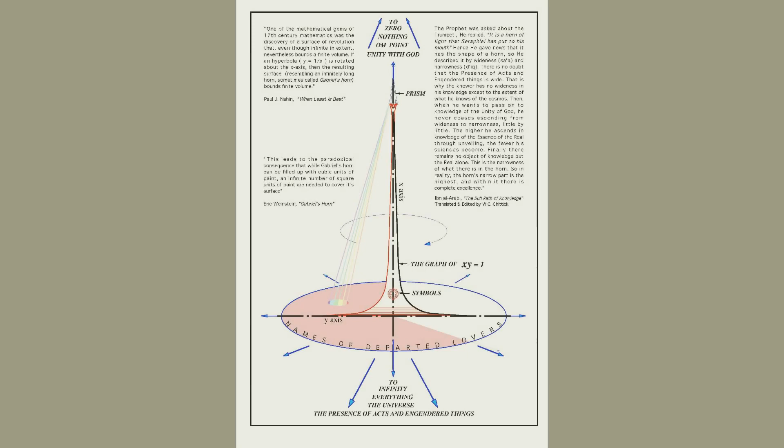That's a hyperbola, and it starts level and gradually becomes vertical. When that's rotated on its vertical axis, you get this shape. Hope you can see that.

In mathematical terms, the shape that rises is always approaching vertical but never quite reaches vertical until infinity. At the bottom, it keeps approaching horizontal and never quite reaches horizontal until infinity. So in 3 dimensions, at infinity this pointed object gets so tiny it becomes nothing, and at the bottom that circle gets bigger and bigger until it becomes everything at infinity.

So it's a very clear 3D shape expressing Baba's everything in the nothing, the Om point, Hinduism, where the creation comes from this point.

The mathematicians who came up with this were Christian, and they called it Gabriel's horn. The angel Gabriel blew the creation into existence through his horn. There's actually a reference to the trumpet, and wideness to narrowness is the path to excellence in the Quran. So the major religions seem to also have this image.

We'll get into details here. So that's what it looks like today. I thought we could carve it, but that was a naive assumption. Fortunately we have computers today, and computer-guided machines that can carve stone, and that's what we ended up doing. But the base of the tower is built in the shape of mastery in servitude.

It's built in stone from a quarry near Meherabad. The grave, let's see, is this? Ah, good. So this is the mastery in servitude symbol. This is Masaji and Chanji's grave.

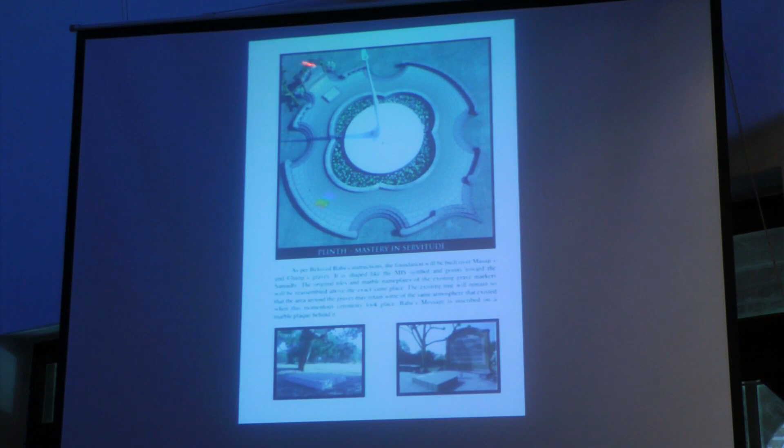The same grave markers were disassembled and replaced exactly over the original grave. This is where Baba sat, and this is where it all took place. On the marble, you can see it here, is Baba's discourse. And the mastery in servitude points to the Samadhi.

So, I think now I'll just start switching slides. I may have something to say about them, or I may not. If I can, this is 10 years of work. Let's see how well I remember it.

The spire. Obviously, we can't go all the way to infinity. So I thought the next best thing, make it transparent. And so it's built in glass.

And at the same time, because Erich liked prisms, I had prisms made, and they're included in this spire. And when the sun shines at a certain angle, you get a rainbow, a patch of rainbow color on the base.

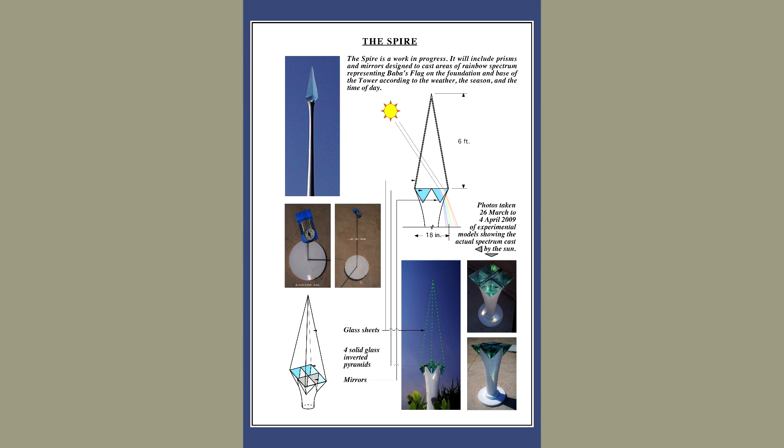In order to test this theory, or at the time it was just a theory, I went and bought some prisms, and I built this little thing to scale and put it on my roof. Yeah, there we are. That was in 2009.

Okay, 11 years ago. And I would orient it with a compass and see what time of day this little patch of color would last. And it worked. That was the model.

And to make sure it did work, I put it up on top of the roof of this house, so it is 56 feet in the air from the ground. And sure enough, it worked.

It moves. You won't always see it there. It has to be a sunny day, it has to be the right time of day and right time of year.

But I also discovered something else. That when you looked up at the rainbow, the spire itself turned into these colors. So you move your head a little bit, it would go to all the different colors. It's a nice surprise.

To make this work, the marble itself would not be strong enough, at one point it's only 8 inches in diameter. It needed a backbone. And that backbone had to be really strong, and it had to be really small.

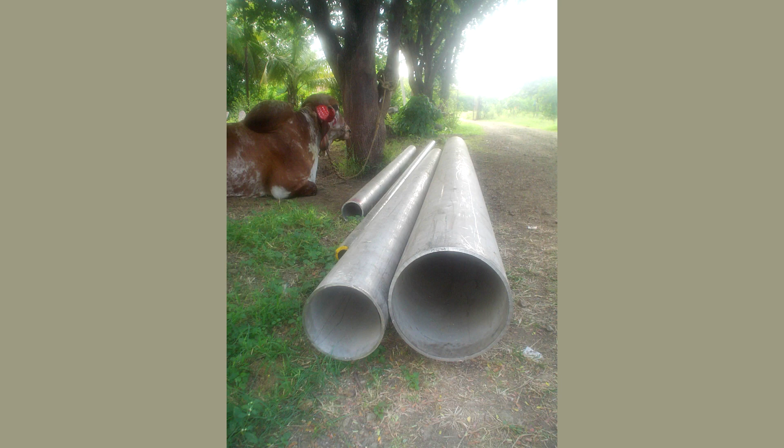And here they arrived at Meherabad. They arrived by truck. I don't even know, I never got to pay the guy. I don't know what trucking company it was. It just pulled up and dumped them.

I was given his number by somebody. Oh, no, he called me. He had my number. And he said, 'Where do you want me to put them?' And I said, 'Well, do you know where Meherabad is?' He said, 'Yes. Which side of the Dhuni do you want them?' And we've never found the guy. And that's a lot of money to transport all those pipes.

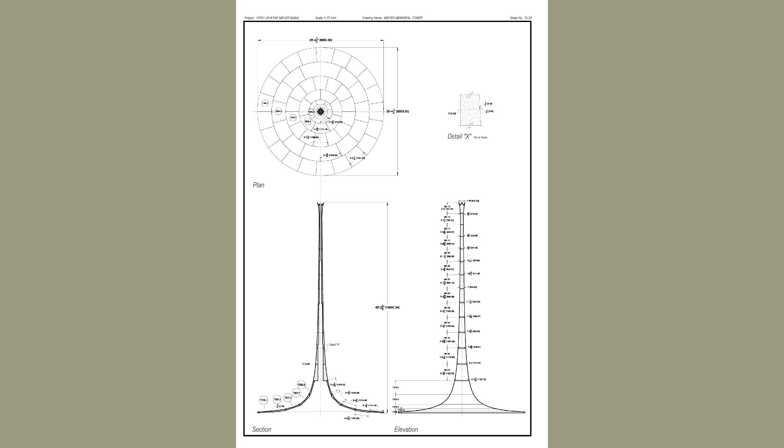This is an AutoCAD drawing. The other thing is, another little miracle, is the appearance of Ty Provosty, who's an architect, American architect. Like I said, the computer machinery that needed to do the carving had to have AutoCAD drawings, and I didn't do AutoCAD, so he said, 'I can.' And he did more than just draw them. He did a lot of engineering on it.

But it's from here, like a quarter of the way up to the top, there are actual cylinders, marble cylinders that are lowered over this stainless steel pipe. And then from here down, it's a concrete base, and the marble are pieces of 3 to 4 inch thick marble shaped like pieces of pie. I guess, well, you can see that.

And this is the factory. Someone suggested I get a hold of these people, and they have a quarry in Mount Abu. If you've ever seen Dilwara Temple, it's the most beautiful bit of marble work you've ever seen. They have this very modern, advanced factory in Ahmedabad that uses computers to carve mainly Jain temples all over the world. We went there. He said, 'Yeah, I can do it,' and gave me a price that was huge. So I said, 'Well, thank you very much,' and went away.

Those are the machines, or one of the many machines. And this is the marble. We looked in their marble yard and picked out the whitest marble we could find.

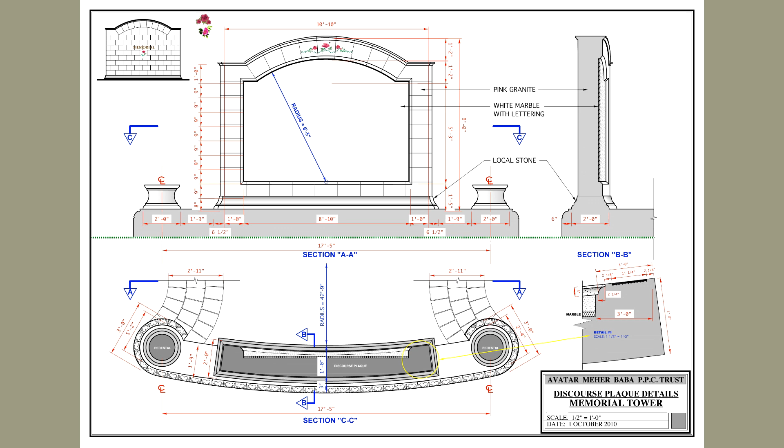Then came the plaque. We decided to do that in granite, and these people agreed to do that too. So that's the model, so far we've just been showing pictures of the model, but the real thing turns out to look very much like the model. These are the granite blocks that make up the plaque stand.

Can you see this, I guess, can you see where it says Memorial Tower there and stuff? Oh good, it's a little fuzzy, maybe it's my eyesight. But anyway, this is at the factory, they're putting it together.

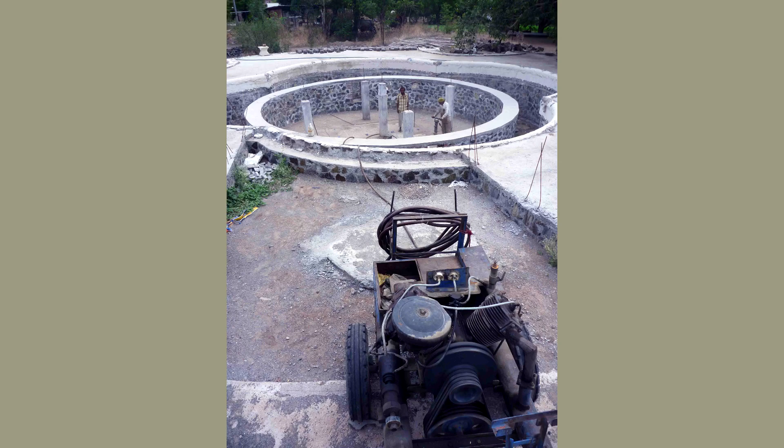That's Baba's discourse. They could do that with a computer because it's a flat surface. The surface that the names are on is not a flat surface, it's a very complicated surface, so it had to all be done by hammer and chisel. So now we just dug out the whole master surface shape down to hard strata and started building up, using jackhammers and pouring concrete, and stonework.

The stones came, as I said, from Niwasa and Vambori, quarries near Meherazad, and they were hand carved. What I would do is make full-size plaster of Paris models of each type of stone, and also stencils. So I don't know how many, but there's probably 200 or so stones with little hearts carved in them, just by some guy tapping away, like that. Can't really do that anymore.

135. 135? 135? Huey knows. Okay, good. How do you know? Okay.

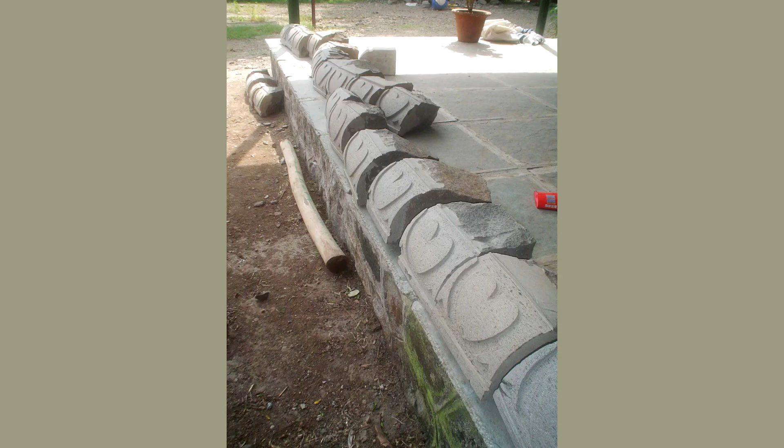That's just around... oh well, that isn't even half then. Yeah, I mean they're all around the outside too. So with forms, little sheet metal forms that showed the edges I wanted, and plaster of Paris models, the masons went ahead and carved all these stones.

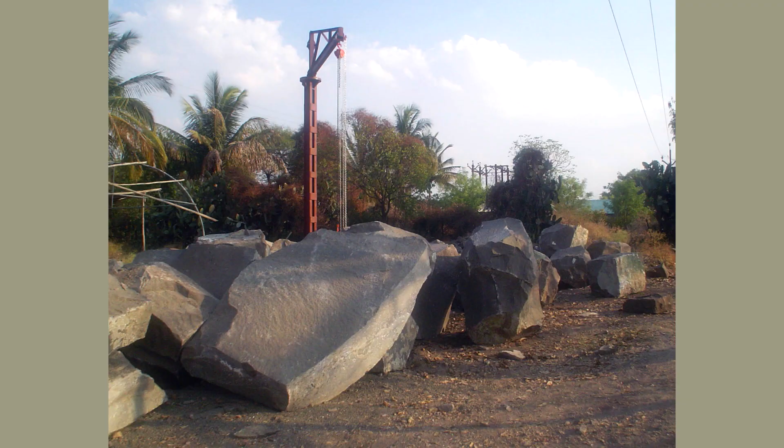Ah, this is what the big ones look like when they arrived. They're huge. So we actually had to buy a crane and erect it there, and it's still there, and also a stone saw with a bed that rolls back and forth. So these huge stones were needed because some of them, well, there's some that are this wide, they may be only this thick, but you needed a stone that big to get that stone.

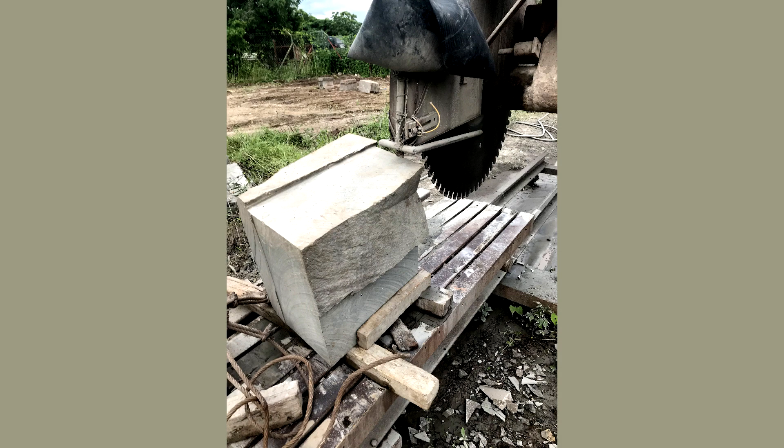And then they were rolled onto this thing, that's a big 3-foot diameter saw blade, and cut into blocks. And then a mason with a little electric grinder wheel would roughen the shape, and then by hand they would chisel the final finish. And these are some of them. Yeah, there's one I was talking about, that's almost 4 feet long, this thing here. It's a big stone that came out of there.

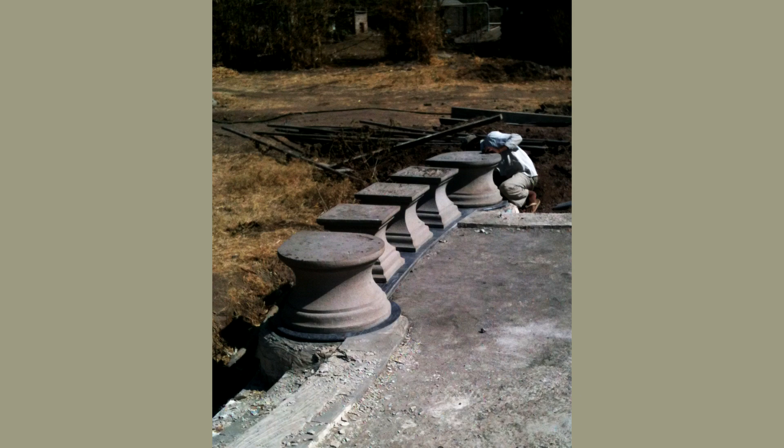I don't know when this tree was born, but I believe it was there when Baba, because the graves are here, I suspect he chose it because of the shade from this tree. I don't know how long. Does Mark know how long these trees live? No? Okay.

This whole section here was actually cantilevered out. We didn't dare dig a foundation for it because we would have damaged the roots of the tree. So this is actually supported over here somewhere, and reinforced concrete is holding this section up, so underneath the tree was not disturbed.

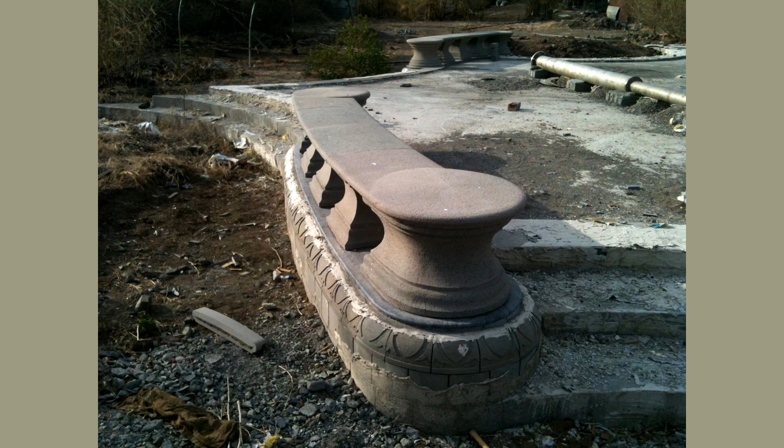So now we're going to put up the stainless steel pipe spine. Everything is basically done custom made. These anchor bolts are like 1 meter long and about 1.5 inches in diameter. The nuts themselves have been custom made. You see, we only need 4 of them.

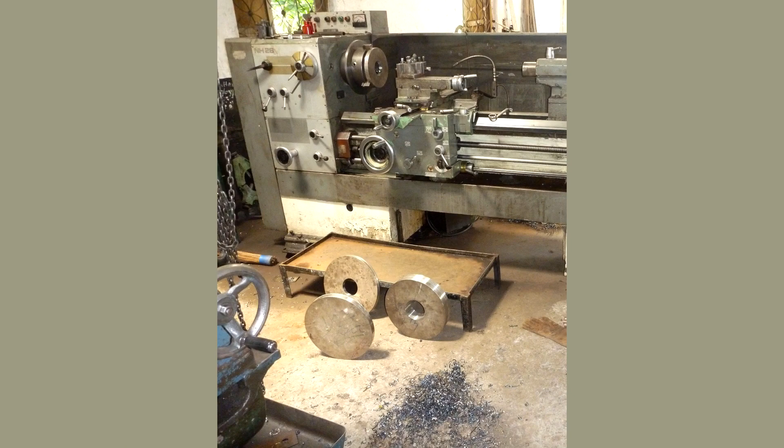So a well-equipped factory with skilled labor is necessary, but then you're only making 4. So these are base plates for the pipes. So there's no motivation for a factory owner to stop work on things that he's making money doing to make these little things. You couldn't pay him enough for one of these for the time it took him and the machinery it took to make them.

But somehow these folks here at this factory, and many other people who weren't acquainted with Baba, somehow understood that they should do this. So they made pretty big sacrifices in terms of time and money to do this stuff.

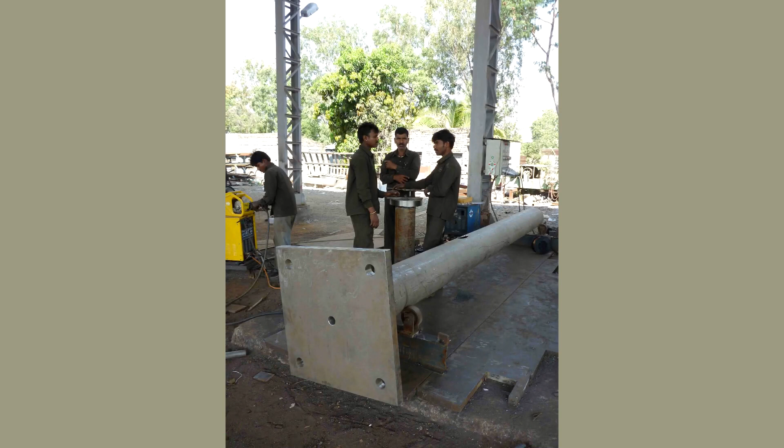This is an MIDC. When I first came here, there was no electricity. And now, the other thing is, I'm expected to weld this with argon shielded TIG or MIG welding, I'm not sure which one it is now. Where am I going to do that? At Meherabad or even Nagar at the time, you couldn't even buy a Western toilet in Nagar. Had to go to Pune to get one with a cast iron flush tank.

But sure enough, MIDC had argon gas shielded welding and stainless steel welding rods, and they put it together. And the big truck to bring it out, crane to lift it in place.

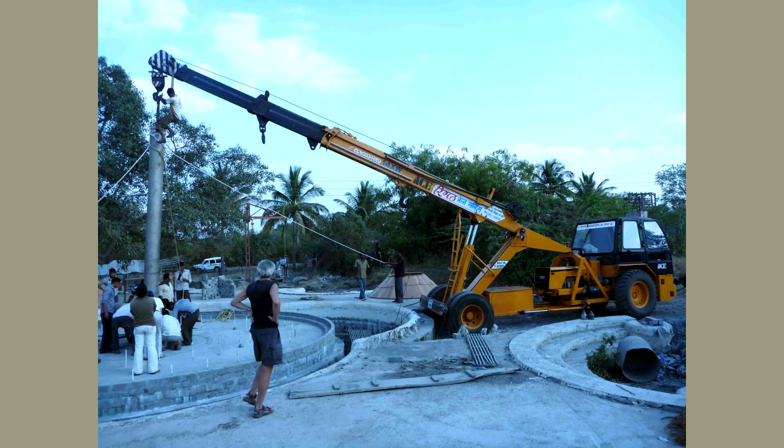This was done in 2 stages because the marble had to be slipped over the top. The first few pieces of marble were so heavy we could never lift them 60 feet in the air. We could never get a crane big enough for that here in Nagar. So we had to do the spine in 2 stages.

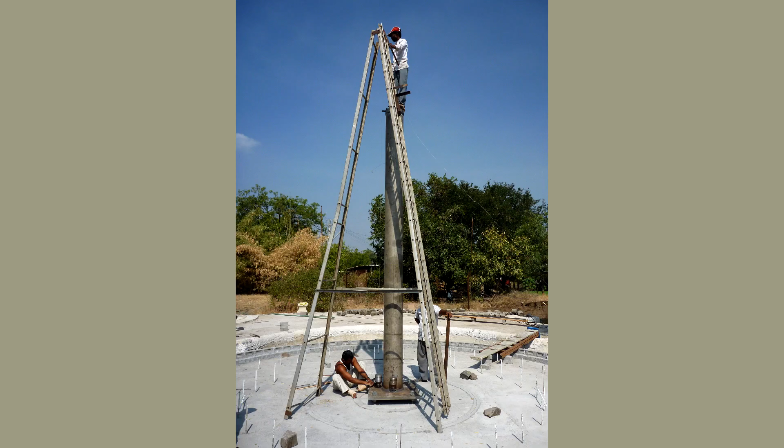So here's how they leveled this. Made a large plumb bob just out of steel. Tied a piano wire to it. Submerged the plumb bob in a bucket of motor oil, and measured the distance between the pipe and the piano wire at the top and at the bottom. The reason for the motor oil is that the wind wouldn't move it around, so you could be much more accurate.

And I think it probably did just as well as we would have done with a laser. They had to make wrenches big enough to tighten it.

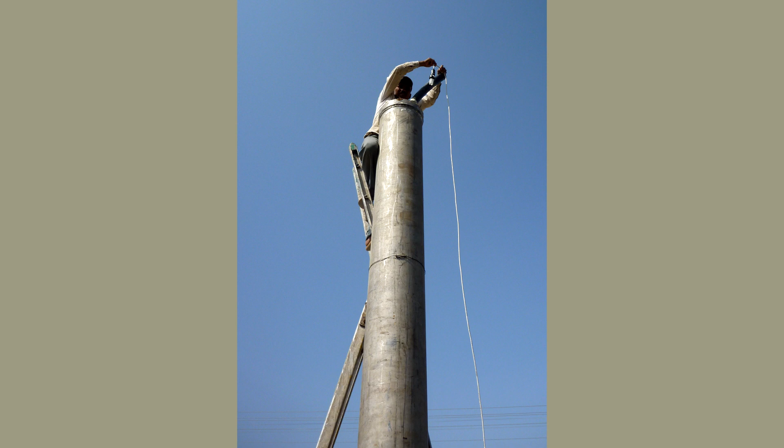We had to fish a lot of wire through there. We had fiber optic glass cables for the lights. We had copper wire for lightning. We had to have holes for draining any possible condensation, and a way out for all the water, and a way in for air to keep it clean and from deteriorating. That's us lowering a light bulb down inside this pipe, and we could drill holes and find out the level inside, so we knew how much concrete to fill up, what level to fill the pipe up.

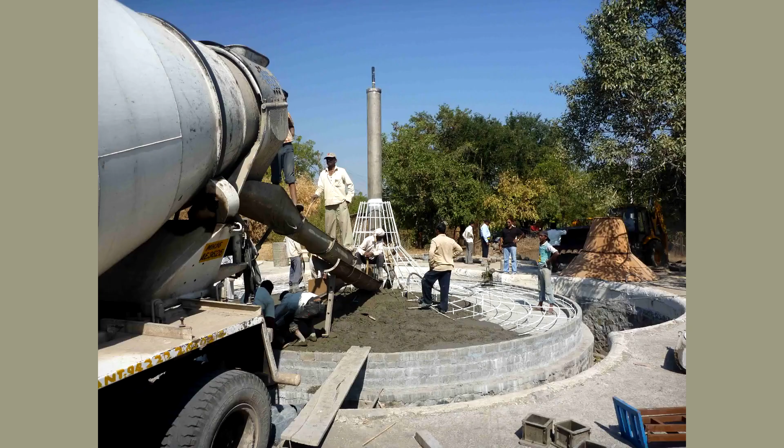Around the first stage of the stainless steel pipe, we poured reinforced concrete. A lot of getting the shape right was done by drawing full-scale curves on computer and tiling the paper together, then cutting it out of plywood. Couldn't have done it without a computer. So it couldn't have been done 44 years ago.

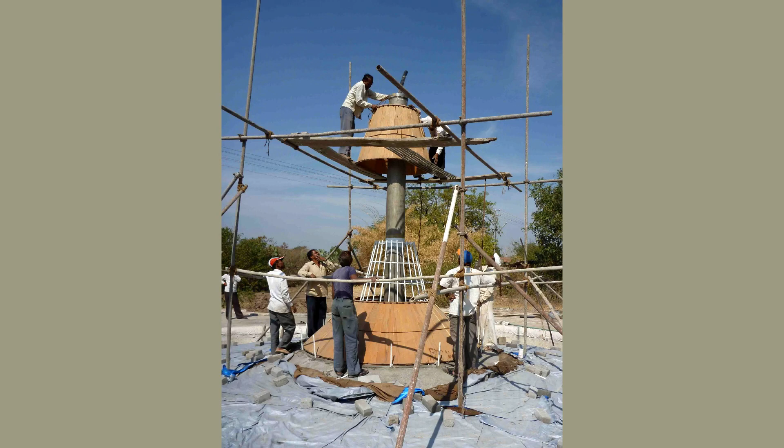And this is the first ready-mix truck I think we ever used at Meherabad for the concrete. We made the forms. Everything's a one-off. And there it is, that's the concrete footing.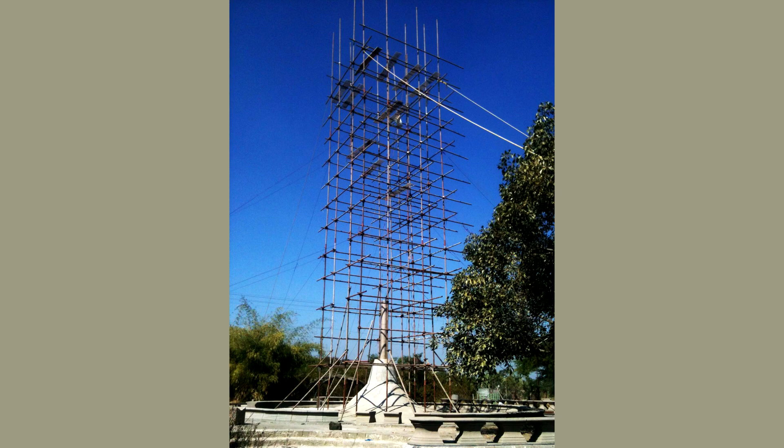So above here, now we're going to put the heavy marble cylinders. Then we're going to put the second stage of the pipe on top of that. Then build scaffolding, and with a pulley block, lower the rest of the marble cylinders. And then after that, the scaffolding comes down, and the tiers will be bolted to this concrete.

So scaffolding's gone up. The second stage of pipe is being fitted. The marble's actually translucent, so we painted the pipe white. It's not very translucent, but it's enough to possibly make a difference.

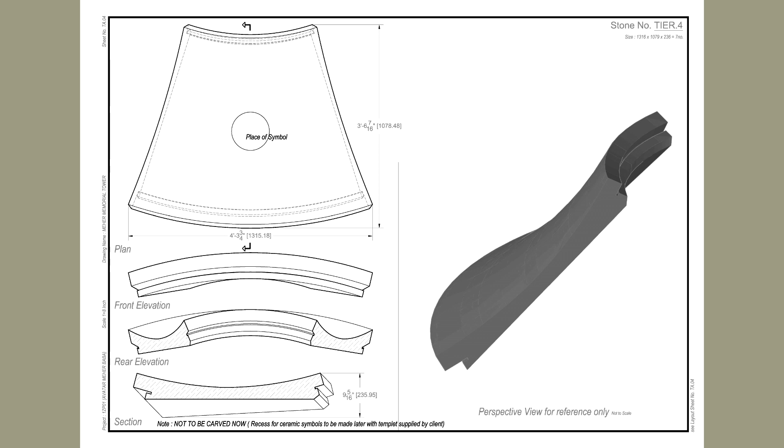These are the shop drawings for the tiers, we call them, they're the pavers. They're very complicated, as you can see, curve this way, curve that way.

So these are the tiers. They're about 1 meter long and somewhere around 1 meter or more wide. But you can see how complicated. They also had ridges in them because they're supported by stainless steel brackets. They're not set in mortar.

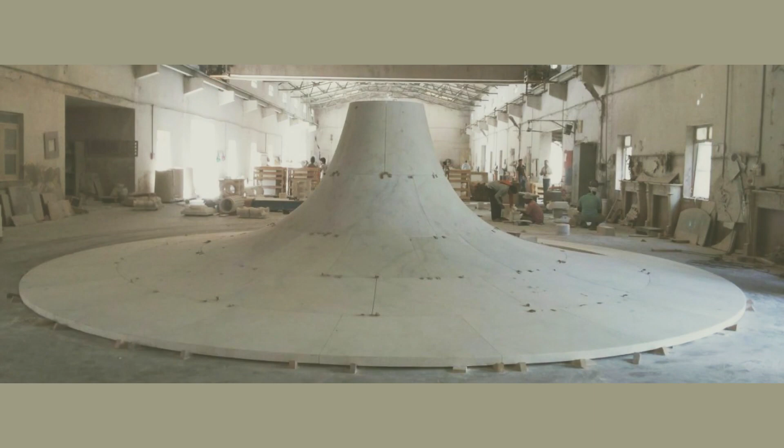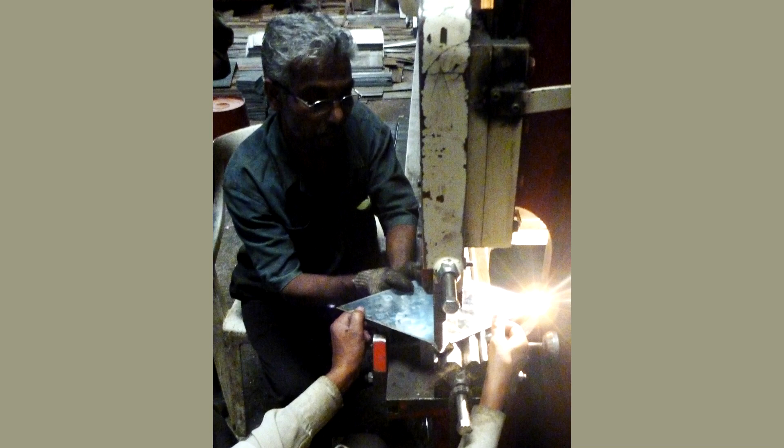And they assembled them in the factory in Ahmedabad and then took it apart and sent it to Meherabad. So the next step was, because we've got the marble cylinders up there, and the scaffolding is still up, and that next thing is to make something to hold the glass spire together.

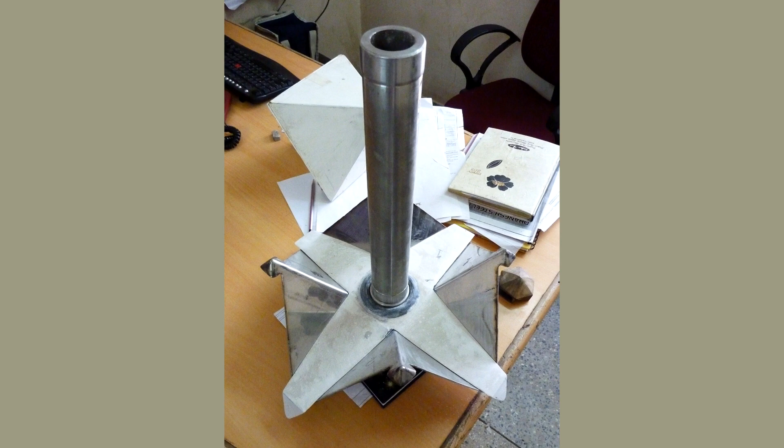And that all had to be done in stainless steel, and it had to support the prisms. It had to be removable in case someday the glass breaks or needs to be replaced. And it had to rest on the pipe and not on the marble. The marble, this was very heavy with all the glass and all the steel. The marble would get crushed by the weight of this thing. So those were challenges.

Some pieces were cast, some pieces were welded sheet metal. And then there are just these little ones, only 2.5 inches or something. We only needed 4 of them, but they're very complicated, and a good sized factory had to pretty much stop what they were doing and make these 4 little things. I've never made anything like them before or after. But they were necessary to hold the plate glass in here, to hold the prism, to keep it from falling out.

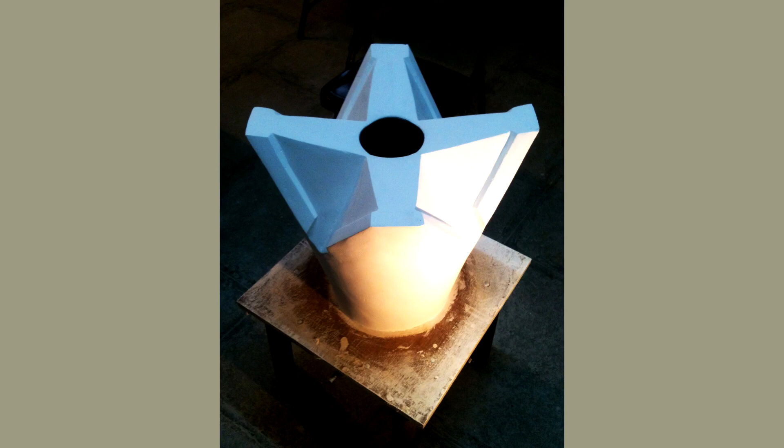That's the plaster Paris model of the top piece. The stuff that's being fabricated, it's not perfect. They're made from this point to this point. Might not be exactly the same as from this point to this point. It might be an 1/8 of an inch difference. So all this stuff kind of had to be, what would you say, handmade. It was handmade. The prisms weren't all the same.

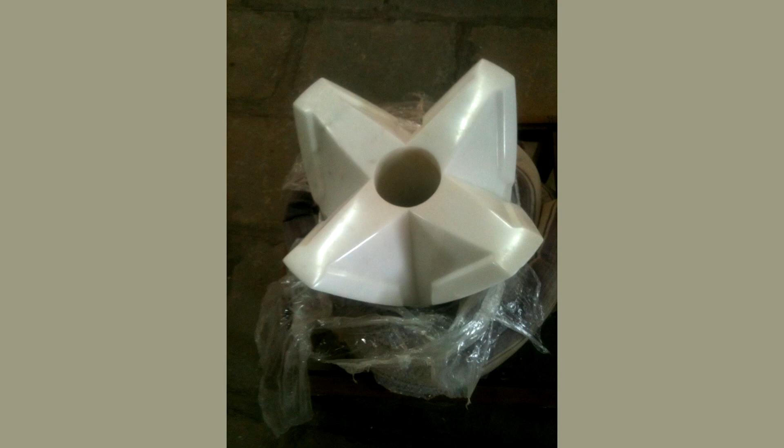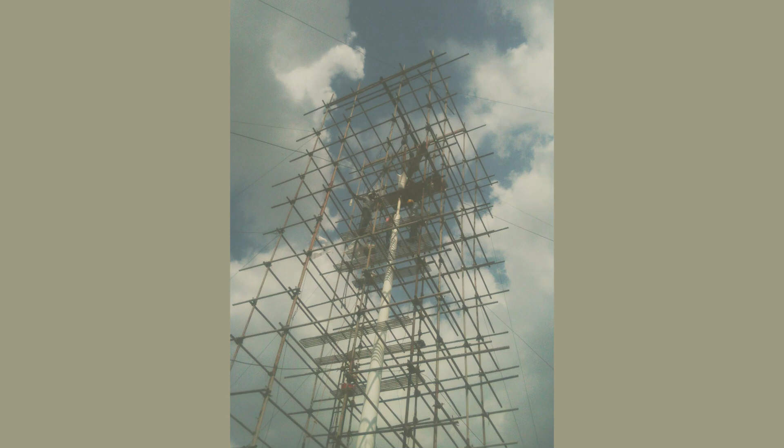So we took the actual prisms, we took the actual stainless steel cradle, poured the plaster Paris around it, fiddled with it, carved it, and got it right, and then sent it for the marble to the marble people. That's the cradle that will hold all the glass prisms and the plate glass. And that's the marble piece once they had carved it. Now they're sliding the cylinders over the thing. These cylinders get lifted all the way up to here and then lowered down to there. Here we are. They celebrate. And then we put the top piece on.

The company that we found to get the lightning arrestor stuff, it was Erico.

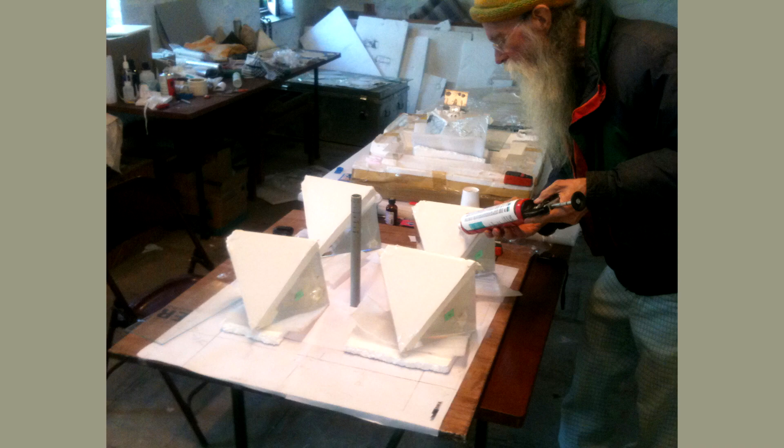Did you say where the glass came from? Oh, no, I didn't. That's a good story actually. First of all, no one would do a prism, no one would build pour glass for 4 blocks in that shape. And I emailed and begged all these glass companies until on the internet I found some family business in Shanghai, and I emailed them and they said, well, we'll try, if we get a big order for this type of glass, because it had to be non-expansive glass, we'll do it for you. So a year went by and they finally said, look, we're never going to get an order like that, so thank you, but we can't do this.

And I had no plan B. So I begged, and I sent them Bible literature, and I asked them would they please do this? And they said, okay, we'll try, we'll see. And a few weeks later they said, we've poured the thing, you should be receiving it in about 3 months. This glass, being solid pure glass, they have to cool it down about 1 degree a day or something. If it's allowed to cool, if the outside's cooler than the inside, it creates stresses and it will crack. So it's a big deal making glass this thick. And sure enough, they did it.

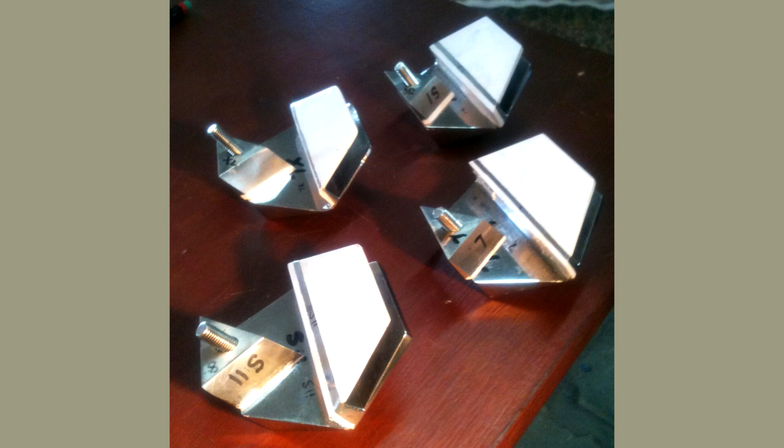So this was an experiment, again everything was experimented with. This is what I'm talking about, the gasketing, and everyone's a different shape and size.

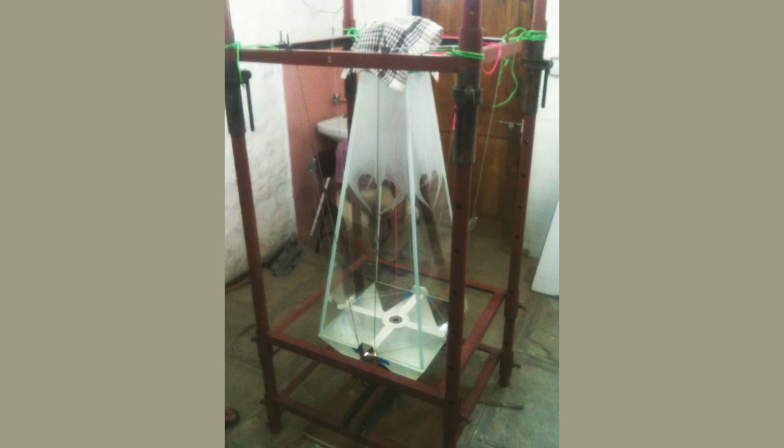So putting the glass thing together, one of the tricky bits was keeping it clean inside. You couldn't really work inside, yet silicone had to be applied to these joints. Huey figured out a way to keep it from gobbing up and going inside.

And then we had to figure out how we're going to raise and lower it evenly, because the inside had to look good, but we had no access to the inside. So we built this contraption that would raise and lower the glass pieces.

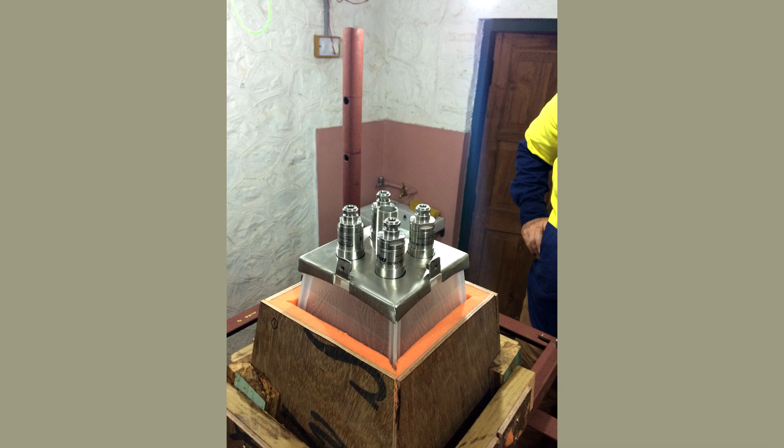These are the lenses for this fiber optic light, and all this stainless steel caps, and they're all just one-off things.

Silicone. Couldn't have done it without silicone either. There's Huey doing the final cleaning with the little windshield wipers.

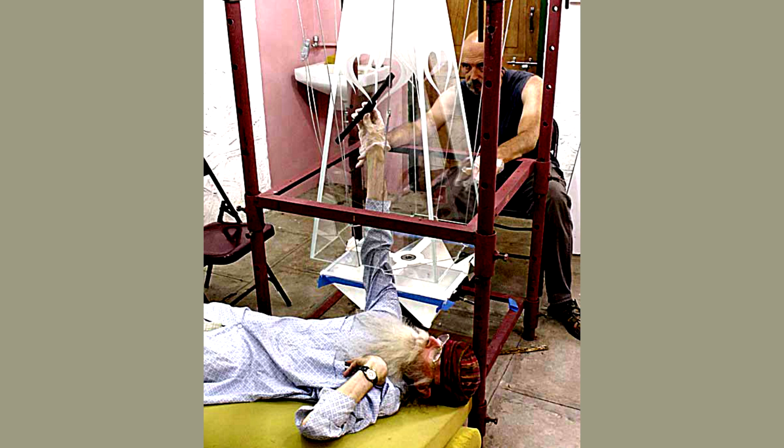And Bob, what were you doing, Bob? Keeping it from falling on him? What was he doing? Oh, so you could reach up. All right, yeah.

So then it was all put in a box, and the top was ready. Let's see, what's next? Oh yeah, here. This is interesting.

The marble and the steel spine expand and contract at different rates. So we had to do two things. One, you had to support the marble so it didn't just wobble around, but it also had to move smoothly up and down as the steel would expand more than the marble.

So Teflon shims were on every corner, or you'll see them better in some cases. So it kept the marble from wobbling, but at the same time it could slide up and down.

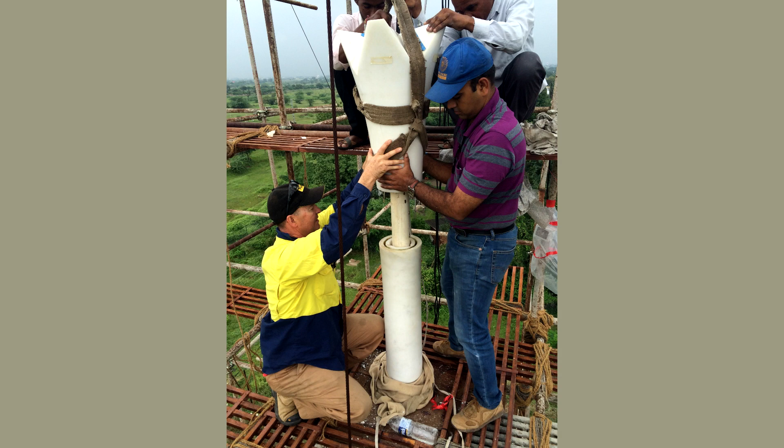And then the top was put on, or replaced. And we have all this stuff that has to go inside: the lenses, the lightning rod, the fiber optic cable, and then it all goes inside this stainless steel cap.

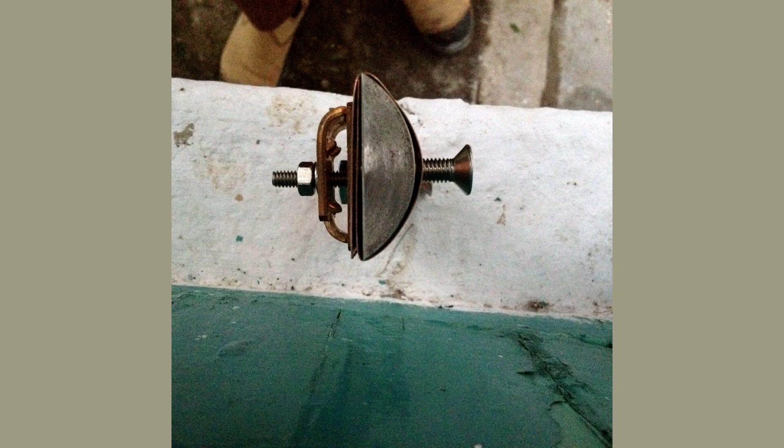And the lightning rod had to not only be a copper rod at the top, but it had to bond to the pipe in places. Now there's no place to, the thing's running inside the pipe, so how do you attach copper cable to the inside of the pipe? We had to figure that one out.

We machined this thing to the correct diameter, correct curve of the inside of the pipe, clamped the wires to this, and then put a nice copper surface so that it conducted enough electricity, and then from the outside, found the holes and bolted it from the outside.

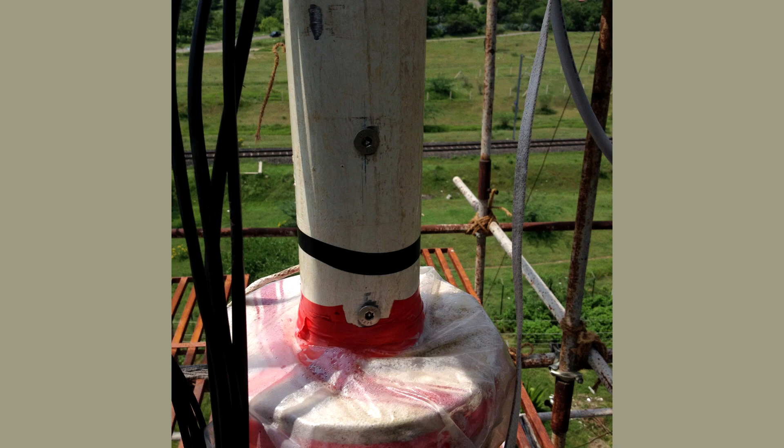These are the, yeah, and this shows where the Teflon shims go. This shows how much above we, now this looks like less than half an inch, but that's because we put in copper washers at this point. Again, we made our own copper washers.

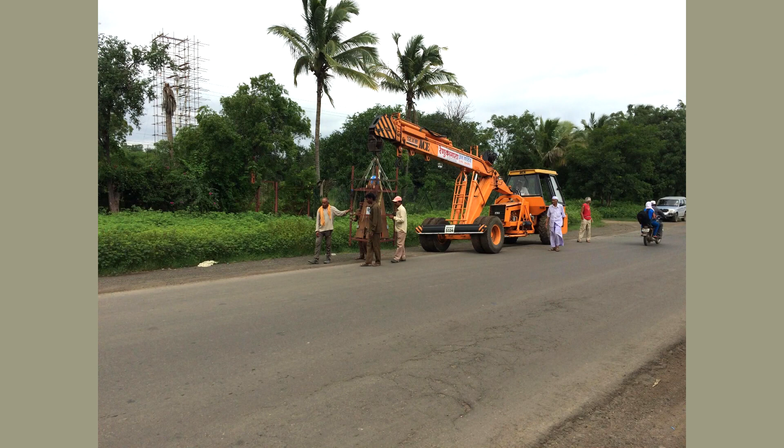Now here we go, now our baby is on its way. It's going to get lifted by a crane onto a platform and then lifted up to the top. Lots of nervous people standing around on this one. And it gets inserted in this pipe.

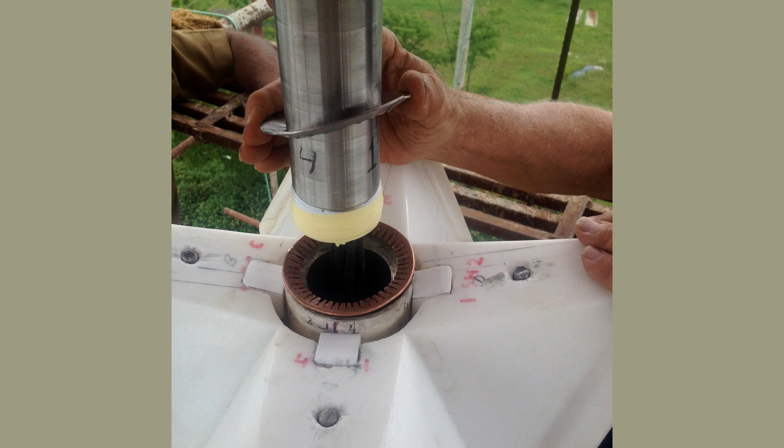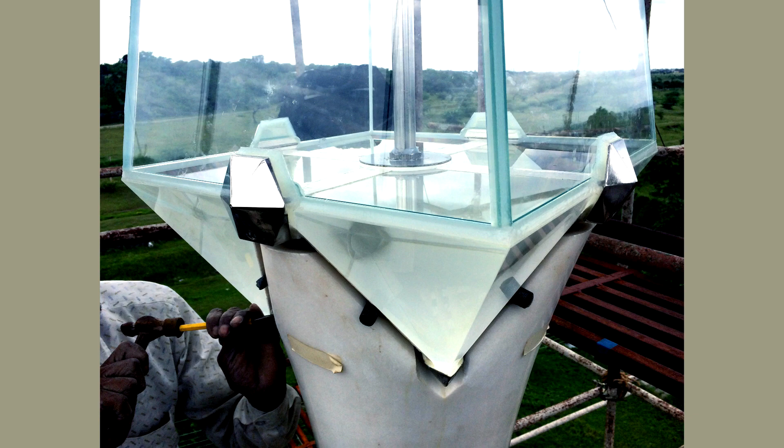And there it is. And then we caulk this part.

This is a tool that cuts the glass. These are the glass cables, or glass fibers, that actually transmit the light - or I don't know what the process is called. And those are the lenses. And this is the fiber optic cable going down. And this is the lightning rod.

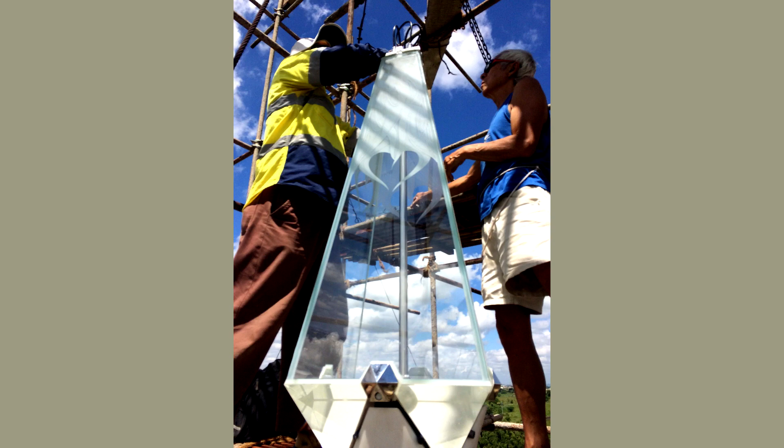And then it's covered with this cap. That was in the evening when we had just finished. You could actually see the library study hall up here.

You don't really get to see this, but Nadia did a lovely design on the top of that thing. There's the library.

To take this copper and lightning conductor - a very elaborate array of copper strips - and in order that wherever there were joints, over 700 years they won't corrode, we used what they call exothermic welding. We also bonded everything together, all the reinforcing, even the anchor bolts that went into the ground. The reinforcing was all covered with epoxy paint.

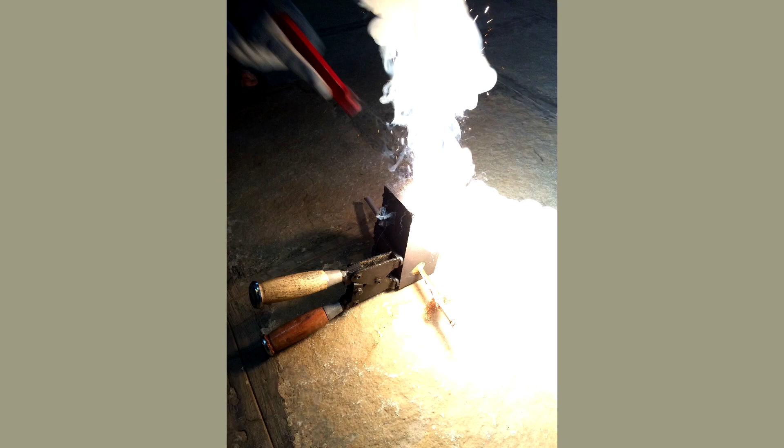So in order to be sure that the copper - where you had to put two pieces of copper together - if you can't just bolt them together, that would last a normal amount of time, but not for centuries. A way to do it is just melt it all together. So there's a graphite mold, you put the two pieces in there, you put some powder that also has copper in it, I think, and an explosive powder like gunpowder or something. And you just set it off, and it all becomes a welded piece.

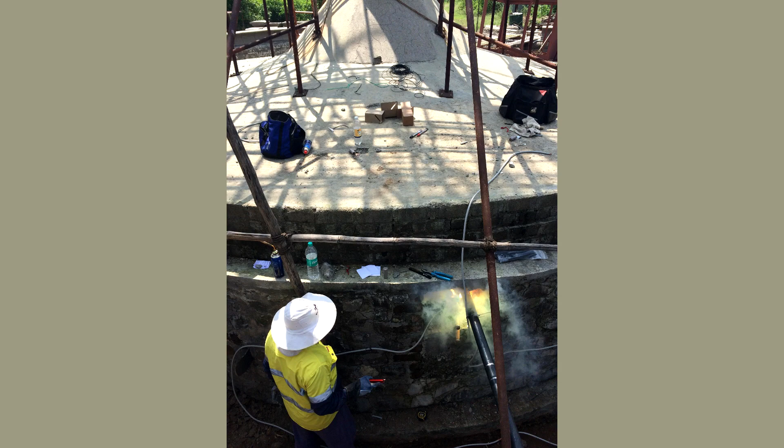They're doing it down here. And after that, the array was buried in bentonite, which is a ground earthing enhancer. Like I said, we did everything we knew to make this thing as permanent as possible.

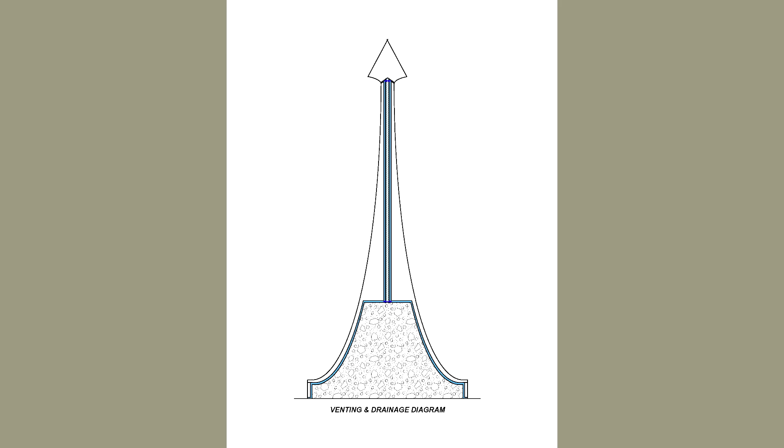This is a simple diagram of venting, because you've got to allow air to come in and water to go out. So there are little holes everywhere, little gaps everywhere, and little drain gutters everywhere. This is kind of how it works - you can see the little straws sticking out here. That's the top, that's how the actual air would escape from the top. There's the little hole.

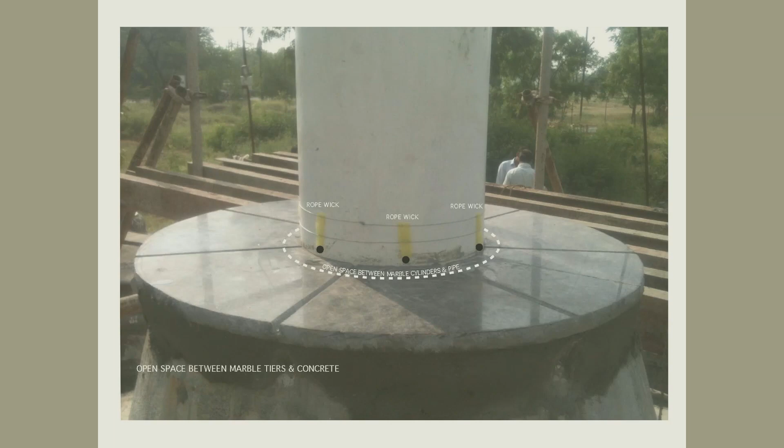We had fun working on the top because every day we ended up with some wild prism thing. These are little gutters for little rope wicks, and they drain into the garden.

I think Jeff is putting sealer on the marble.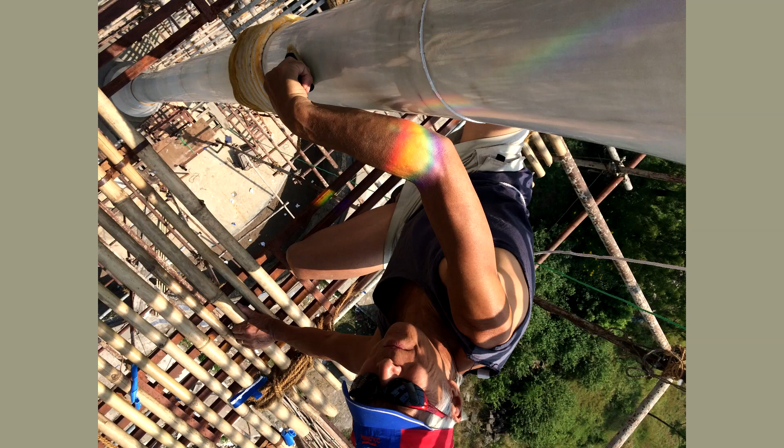The same kind of colorful - it's not a reflection, it's an actual - but since you're also not looking directly at the sun, it's a refraction of the sun.

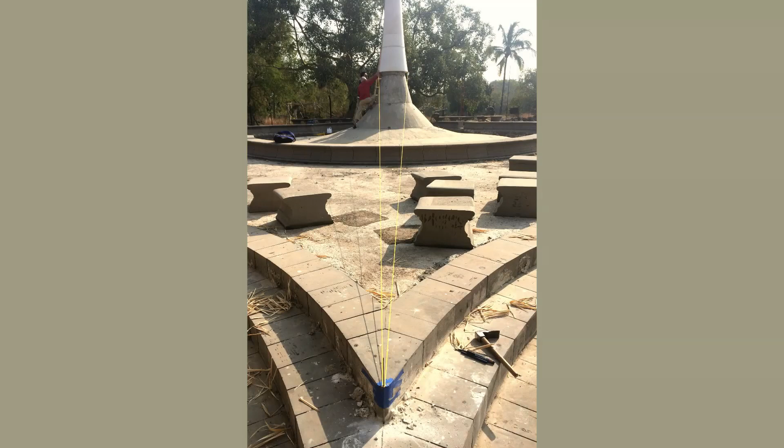Now it's time to put the tiers on the bottom. The scaffolding has come down, and we're lining out the tiers. How are we doing on time? I guess we're doing all right.

So here we are, we're bringing in the tiers. They're being supported with brackets - stainless steel brackets - all being custom made because the shapes are all different. So, as usual, I just made models of everything and took them to these factories.

Pads of Teflon pads and silicone gasketing.

We made - it's my dog Tilly - we made wooden facsimiles, full-size templates for the marble, so that we could place the brackets. We could actually locate where the bolts for the brackets would go. That's one of the brackets with the wooden thing, and then, of course, all these things had to have little extra carved places for the brackets.

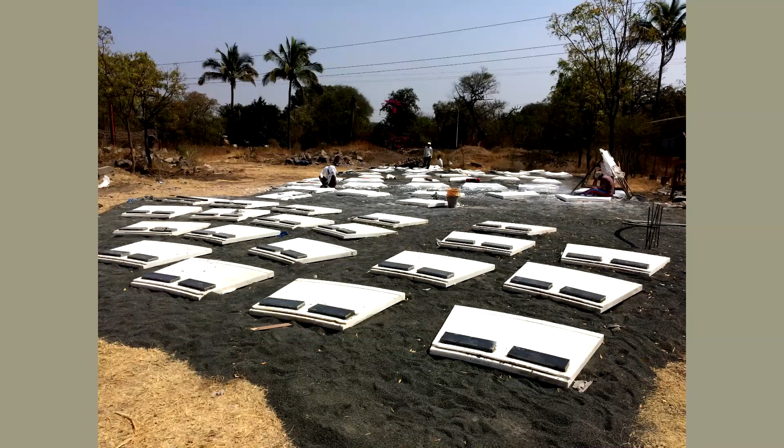I thought we could carve these things - not really. It's the full-size plywood templates, that's how we did it.

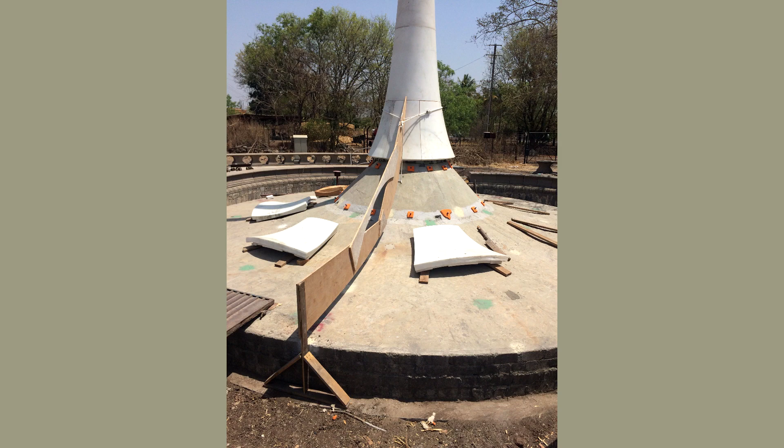It was an exciting time because we weren't used to this happening. And we were there all day long, so it was really pretty neat.

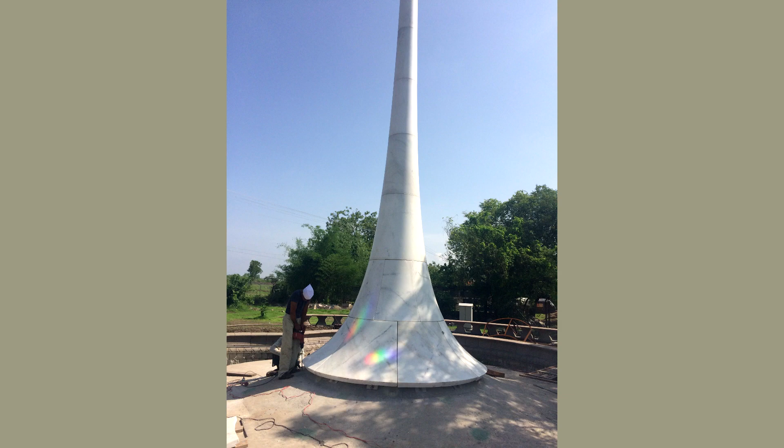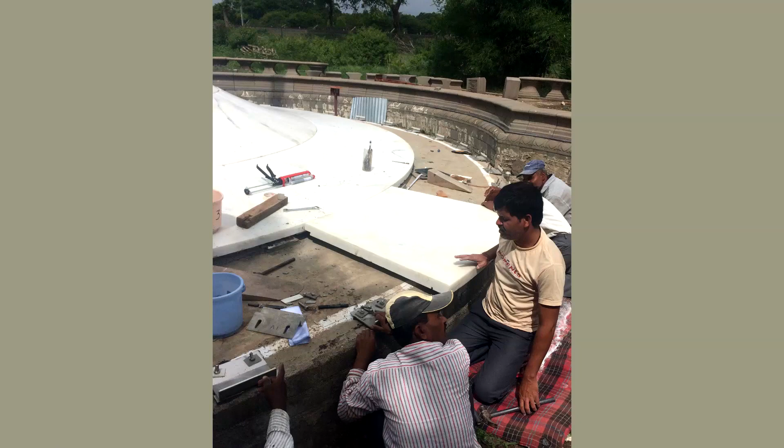That's the final tier. So it's all in place.

The light was working here at this point.

I don't know exactly when this happened, but now we're going to the plaque stand in the granite, and the plaque with the Baba's discourse.

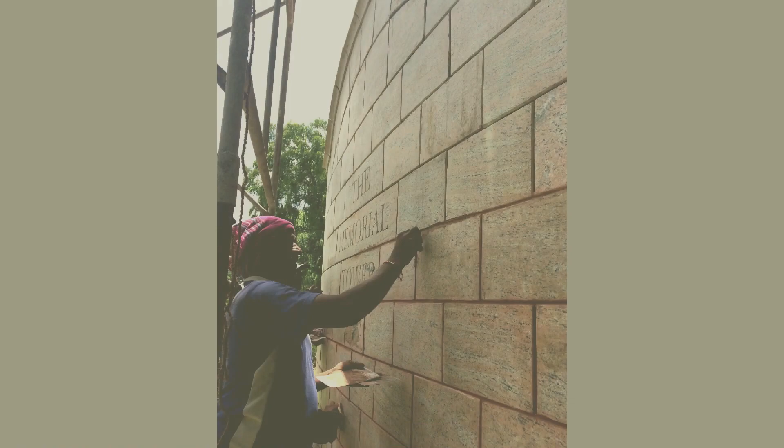Now the names - Haiti and Michael have arrived at this time, and their assignment was to line out and draw the names. There were some skilled marble carvers that were going to come and carve them. So what we did first was Sheila Krinsky from Sheriar Press had been given a list of the names and had, on a computer, figured out the spacing and the curve.

Here's Haiti - she's making a piece of wood with just some pencil leads in it so she can draw these concentric lines.

Then we printed, in full size, the names on newsprint - blank newsprint - and glued them on. This thin paper, the carvers could chisel right through, and then with just water we could wash off the paper. There's Michael and Haiti.

The carvers have started, there they are. It took them 3 months, just 2 men working on it. Wonderful work.

The marble letters were so nicely done. I didn't want to fill them up. Originally I thought I would just fill them with epoxy so we didn't have to worry about rain sitting in there, but I didn't, since they were so beautifully carved I didn't want to spoil that.

So we ended up getting this very special paint that they use at the National Cemetery in America. But it's a hazardous material, and it had to be flown, packed by a licensed packer, delivered to a courier who put it on a special plane without commercial passengers, in a hazmat vault. It cost about enough to bring somebody over here on pilgrimage, but we got the paint.

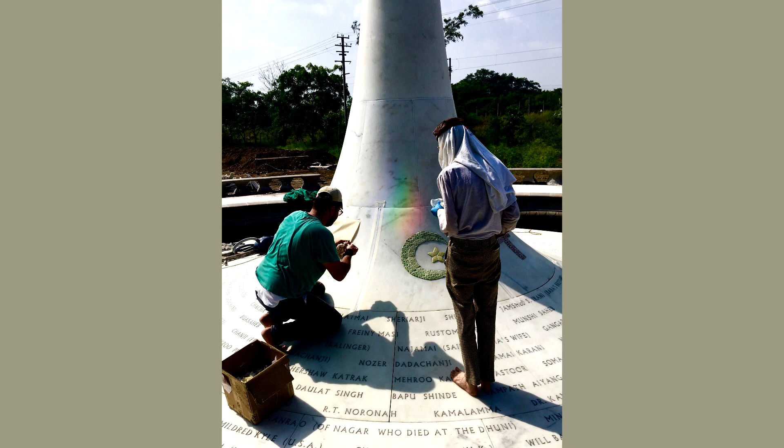The joints are being done in this photo with silicone, very carefully with masking tape, and now the paving. The plinth itself, the tower, is pretty much done. The joints have been siliconed, the letters have been painted.

So we've got a different kind of marble, not a pure white marble, but it's white because we didn't want it to get too hot. People will be able to go up there in the summer without laying rugs down, which I hope never has to happen.

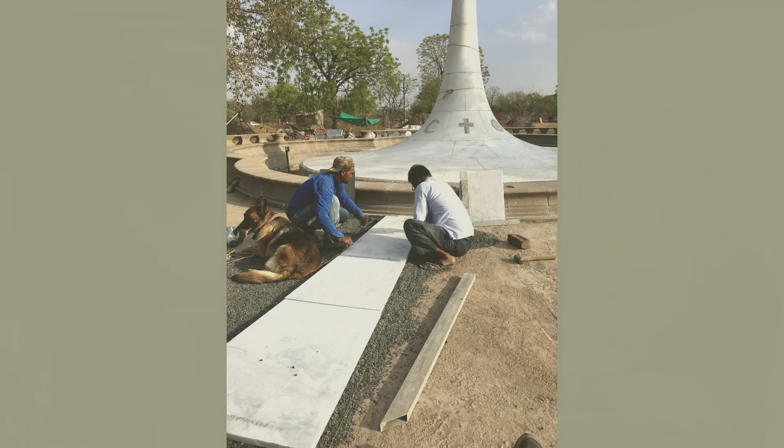One name has a bracket saying who died at the Dhuni. I don't know who died at the Dhuni, but that one name is followed by a bracket noting it. These were the lists that were kept, and lots of them had little comments.

I honestly don't have those names memorized, but if it was on the list that Eruch read to Baba twice in 1968, that's how it is, how they're presented on the tower, even the comments. Even the comments added charm to it.

We're reconstructing the Masaji and Chanji's grave now, exactly over where they're buried, where Masaji is buried and the bedroll is buried.

This is Michael touching up the letters in the plaque. This is the special paint I told you about that we used on the letters, along with some gold leaf. That's the finished thing.

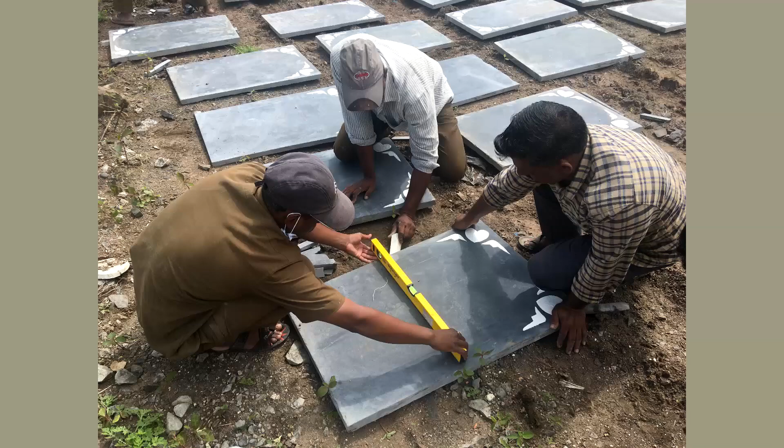And that eats the stone where there is no paint, then the paint gets peeled off and you end up with this design. Here's the guy laying it. So these are kind of finished pictures now.

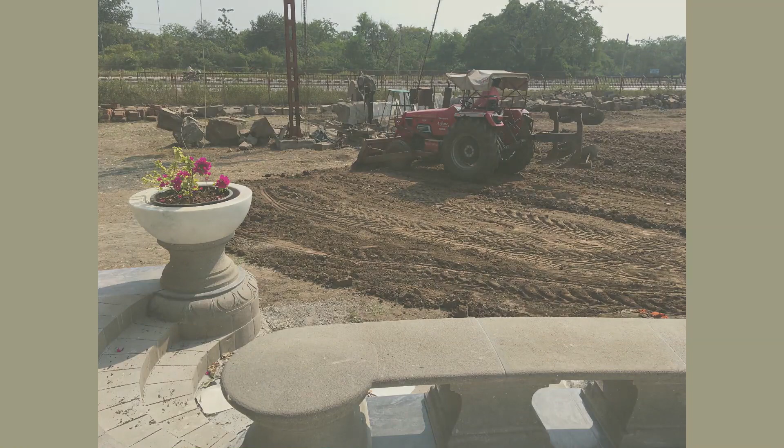Clearing the land, watering the garden, and having the inauguration. Baba was very kind to give us a nice sunny day for the inauguration, even though the day before and the day after were both very cloudy. But on the day itself, it was sunny and we got this.

So people are coming now regularly to see it. I took this just about 2 nights ago, went over there at night with a flood light, and that wasn't bad, it was 5:30.

Jai Baba. Thank you.